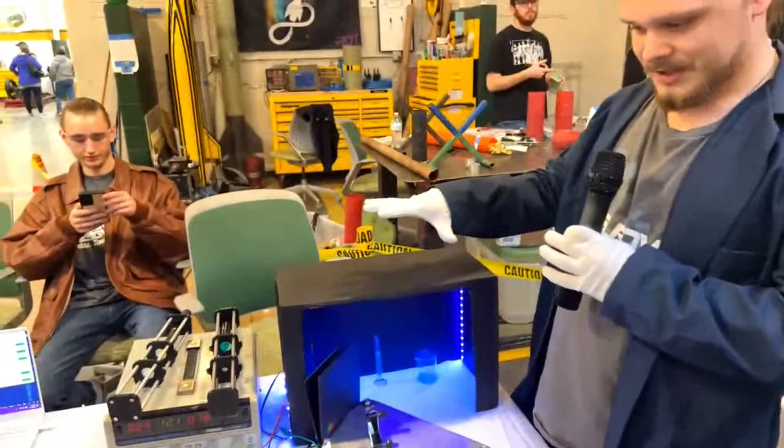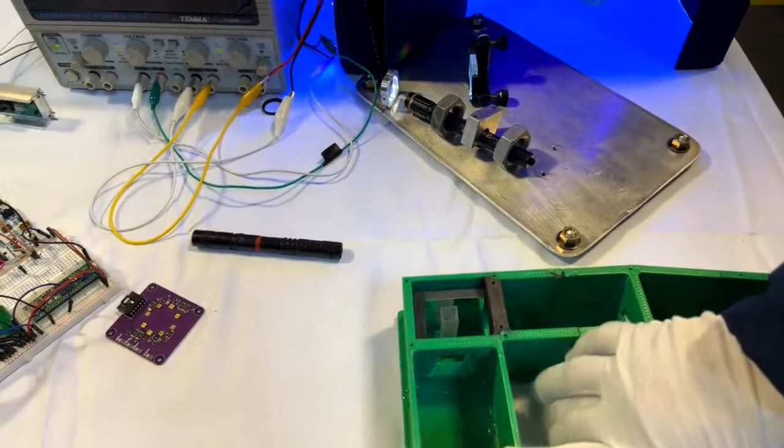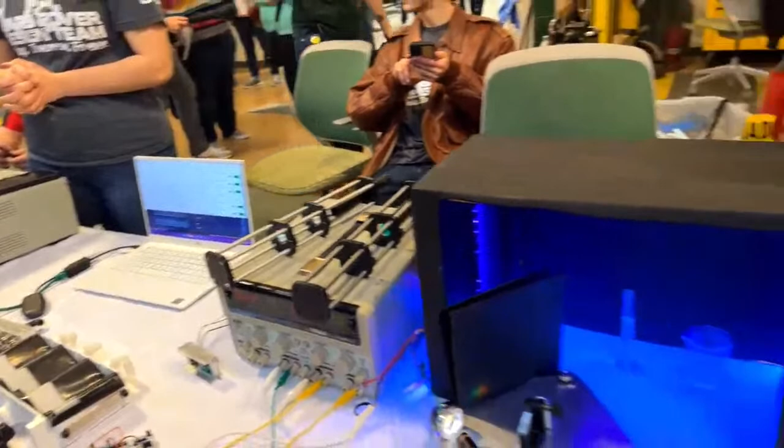Can you talk about your system?

Is it working? Okay, all right, so this is the science analysis part of the Mars rover design team. Basically our goal is to see if there is life in whatever we're looking at. So our competition will give us soil just like this, and we will have to use various methods to see if there's any life in there. One of our methods is actually using a microscope, and we can see these rocks and particles in here - we can kind of see, is this the right stuff that could have life in it? Another thing we have is chemicals.

What's happening? Damn. Rest in peace.

Do I start from the beginning?

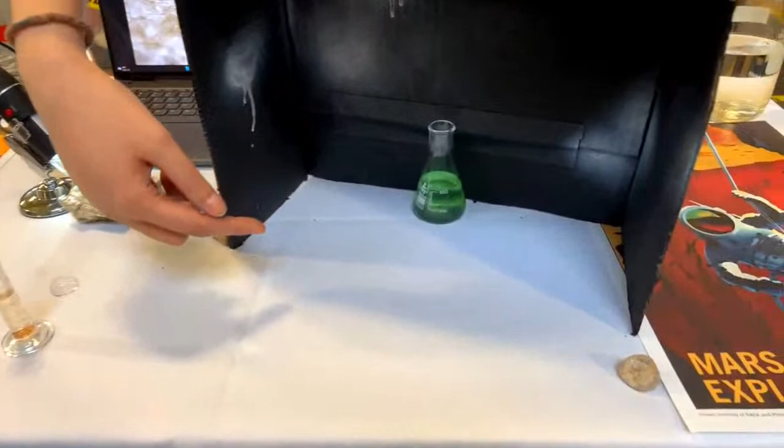When you shine a light... light's not even there, hold on.

When you shine a fluorescent light on this chemical, it will actually shine a different color. That's one of the things we use to detect life, because all molecules will fluoresce at a certain color. They shake a little bit, and that bounces back a different color, and we can see that there's something in there.

We also have different chemicals that will change color when something is present. Right now our chemicals are looking for proteins and sugars, both things that life needs to keep going. Lastly, one of the newest additions to the Mars rover design team's science analysis is our fluorometer.

We are super excited to use all of our technology in this year's competition and see what we can find.

Jacob, can you tell us about the autonomy?

In the autonomy task, our goal is this: we'll be looking for a tag like this, and they'll give us a GPS coordinate within 60 feet of that tag. From there, we need to drive within just 6 feet of the tag and then flash our lights to show the judges we're close enough and finished.

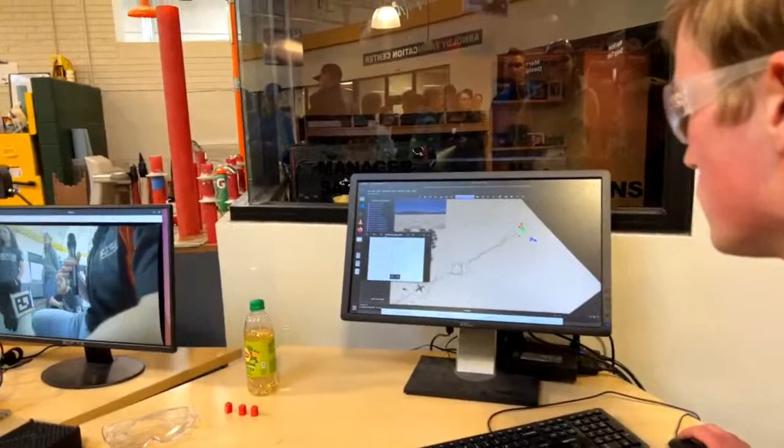Setting up the rover and testing can sometimes take a few hours just for prep time, so this lets us test efficiently whenever we have new code and just want to see if those small changes work.

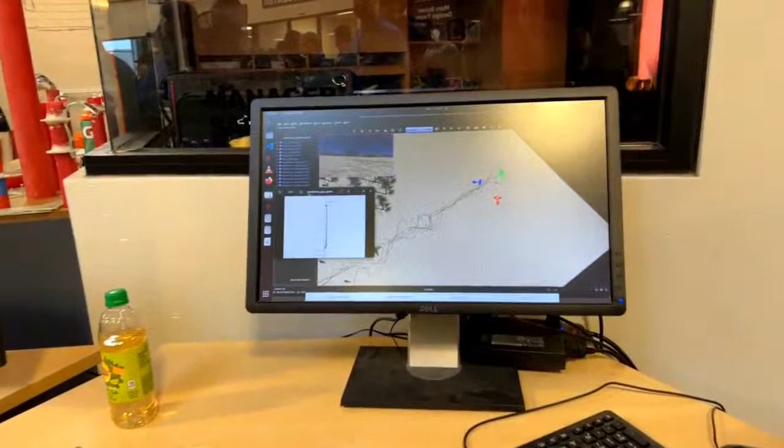Everything in the sim is absolute, so the GPS is perfect, and there are no outside factors that could affect it poorly. So we know if the code is behaving improperly, it's a fault of our logic and not something like the electronics or GPS. This is good for knowing the code itself is good, so that when we go outside and test it, any other problems may be from an outside source like GPS. That way we know how to account for things and fix it.

Anything to add, Clayton? Yeah, that's autonomy.

What am I doing? Is this an interview? Explaining what's going on. Explain what's going on with the lights. Explain to the boards.

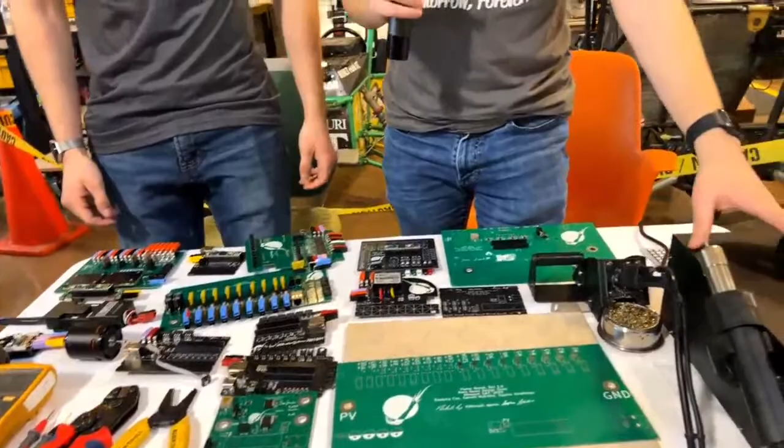Okay, well this is the electrical table. Here we have all of our PCBs we make every year. We start from scratch; we design all of them from scratch.

A separate company actually manufactures them, but once we get the blank boards like this, we assemble them all until we get a finished board like this. We have a bunch of different boards.

So we have the power board, for example. This takes power from our battery and distributes it to all the other boards on the rover.

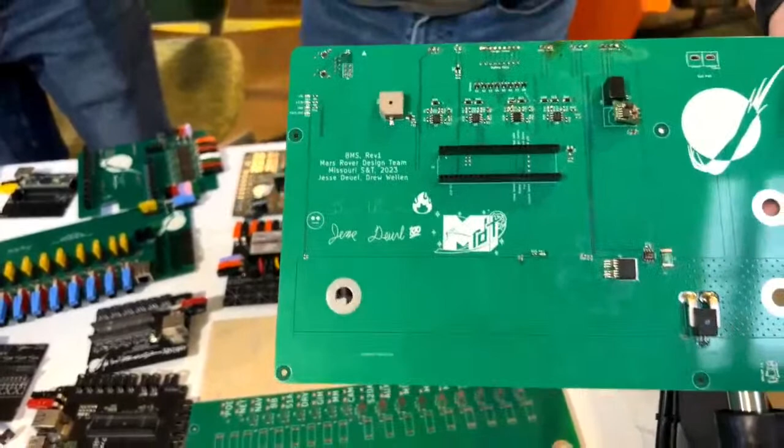We've got the BMS. This plugs in directly to the battery, monitors the battery voltage and battery current, and makes sure the battery's safe to operate. We don't want the battery to be unsafe.

We have a drive board. It controls all the motors on the rover, so we send it a drive command, go forward, go back, and it translates that into commands to each individual motor to make the rover move.

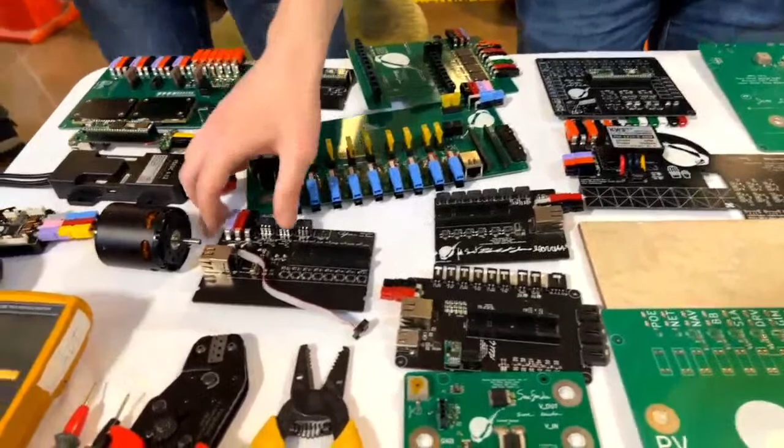We also have a gimbal board. All of our cameras are on little servo motors, so we want to be able to move the cameras to see. We have a rotate and a pan so we can see in any direction we want with our cameras.

We also have a nav board that tells us where we are. It has GPS on it, and we use it for our location whenever we're doing autonomy.

This is live. Oh, hello. I mean, sure, I can talk about anything.

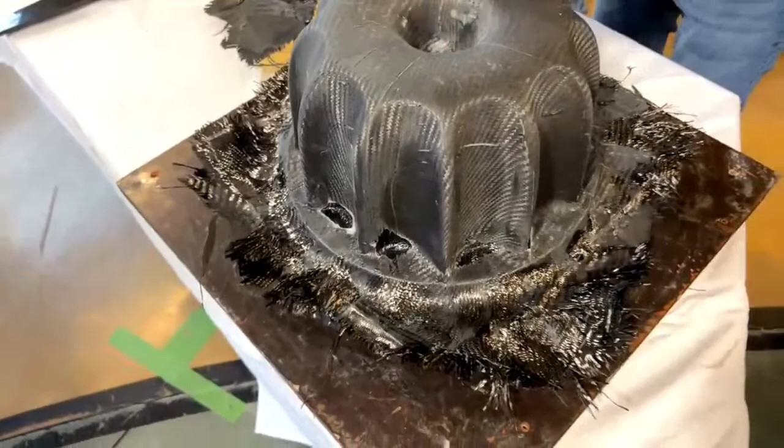So this right here is one of our custom-made carbon fiber wheels. It's not fully finished yet; the finished ones are on the rover at the moment.

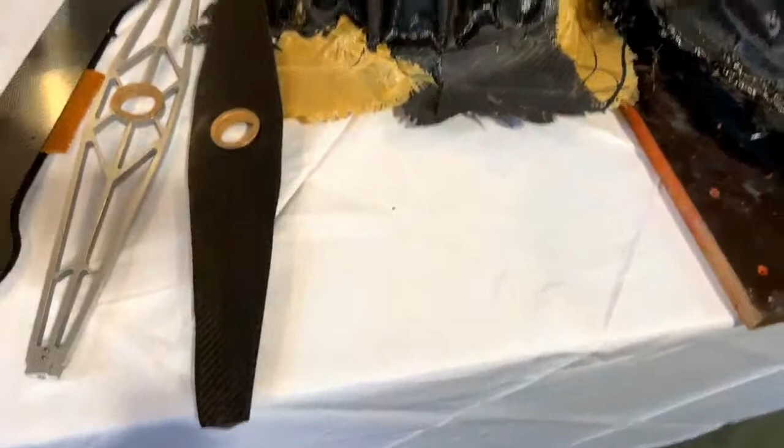What we do is take this mold and layer it with carbon fiber. Sometimes we use Kevlar to get different levels of strength and resistance. We layer it with a lot of different epoxies, layer by layer, to integrate it all, put it in an oven, and it comes out like this.

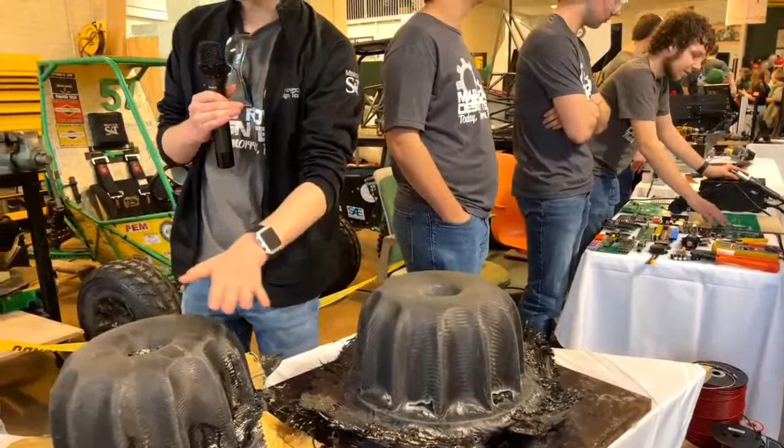Now this is only one of the stages, obviously. This whole table has a lot of carbon fiber stuff, more pieces for the wheels, and so on and so forth.

The whole thing we're trying to do this year is replace some of the components with carbon fiber. You can see that with the diff bar and the experimental diff bar here, because carbon fiber, when engineered correctly, takes no strength loss—sometimes we even gain strength—and it holds up really well while being a lot lighter.

That's what we're going for. We want to save as much weight on the rover as possible so we can put it towards other new systems. If you've seen science yet, we're trying to put a fluorometer on there this year, so we've got to get that weight from somewhere. We're cutting things where we can and engineering new solutions to continue to be here today, tomorrow, forever.

I don't know that we have much.

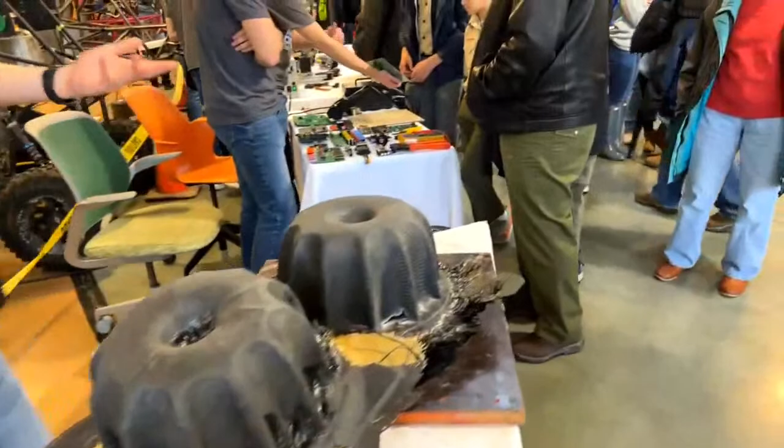Hi. How are you guys? You in the front?

So this is the computer that we use to interface with the rover remotely. Every tool that we need to interact with or control the rover is done here.

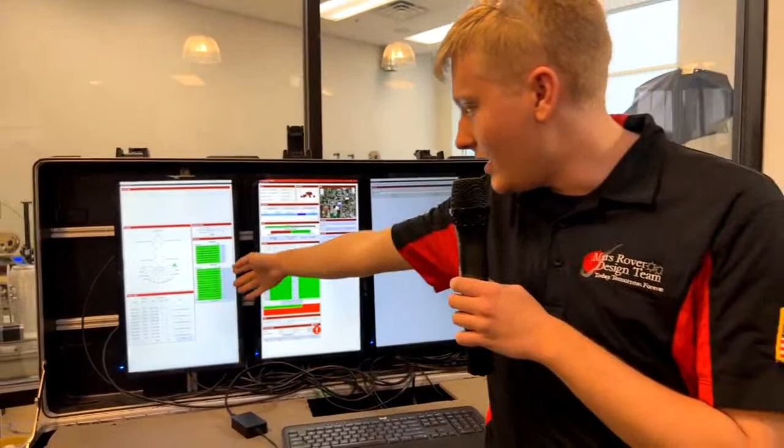Over here on the leftmost screen, that's the Rover Overview of Network, or RON for short. This includes all the tools we need to monitor our connection and monitor the data or packets being sent to and from the rover.

This is the Rover Engagement Display, or RED. This is sort of our master interface, giving us the broad, most important controls that we need to interact with the rover—like the map and GPS controls, battery monitor, and speed limit control scheme.

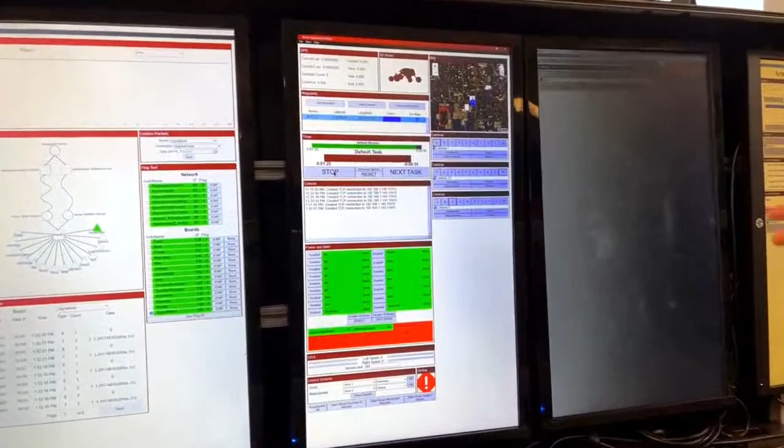Over here we have the Rover Imagery Display, or RID for short. This is just the big camera screen so that we can see what's going on.

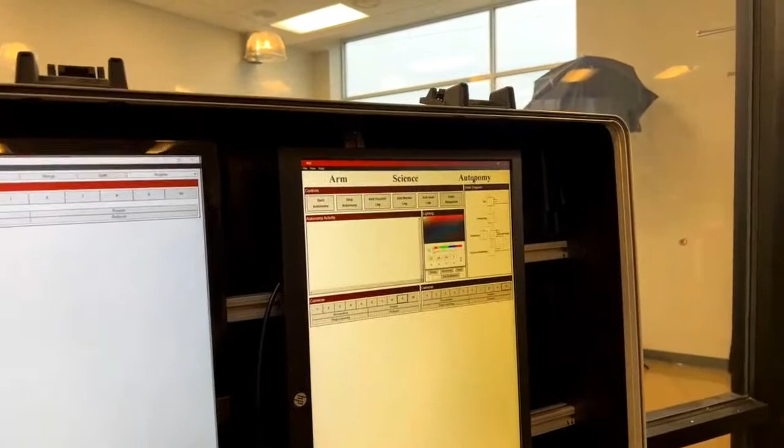Over here are our subsystem controls. This is everything you need to control the arm, this is everything you need to control the science system, and this is everything you need to run autonomy.

Hi, Grandpa. Great. Can you tell us about the signal stack? Sure.

This signal stack has two different frequencies that we can use, 900 megahertz and 5.8 gigahertz. Essentially we can rotate it to whatever angle we want, so we have a stepper motor on the signal stack here. We can send step commands, and we're working on sending position commands as well, so we can point it towards the rover and get a better signal connection.

Hi, Mom. Also, Today, Tomorrow, Forever has changed its meaning for me every step of the way that I've been on this team. It started when I was just a member wanting to expand my knowledge—I didn't really know anyone, I just knew I needed to learn more. But now I would say I'm here because I like the people I'm with, and they feel like my family at this point.

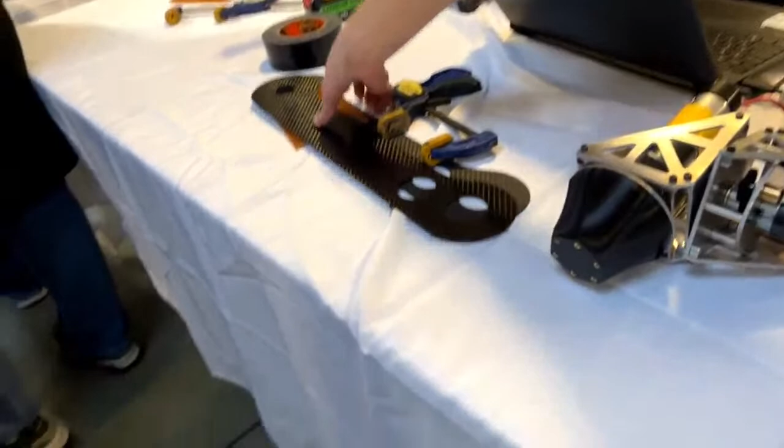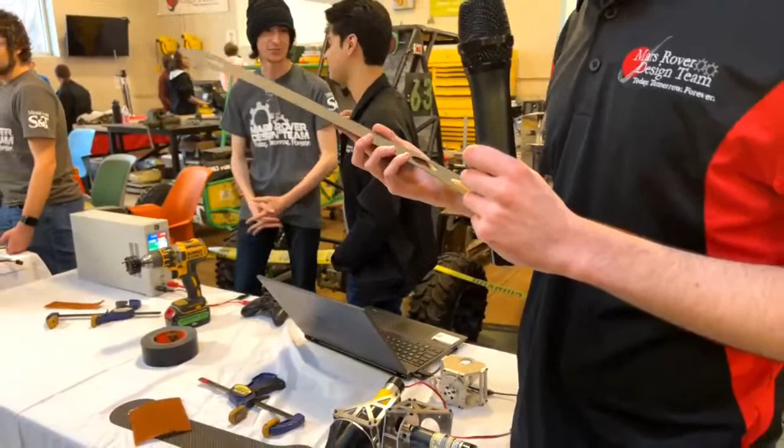So we have some different R&D stuff for the arm we've been working on here. These are a pair of carbon fiber plates we're going to use to replace an aluminum part on the bicep. Currently they're a little bit floppy, because they're not spaced apart any. So what we're going to do is take these, add some aluminum inserts where it attaches so we don't have bolts going through carbon fiber.

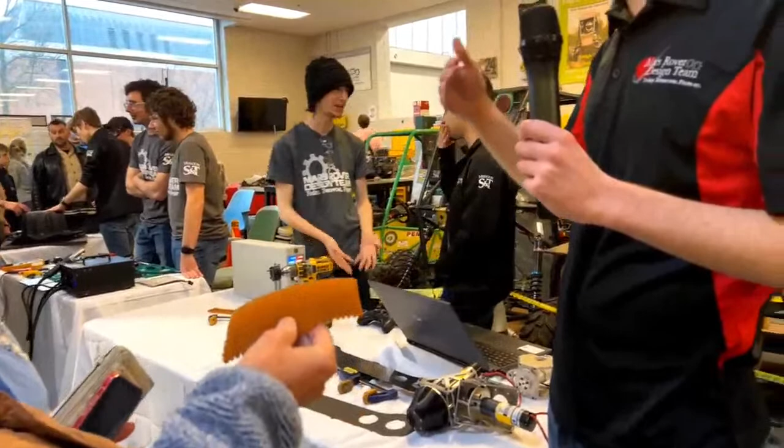And then stack it up with a piece of core material here in the middle. This is Nomex stuff, but you can feel it, it's very light. It just exists to take space, so you can space your components apart, increase the moment of inertia of the part, and make it a lot stiffer.

So this will save some weight over the aluminum equivalent, and it should also be significantly stiffer, because carbon fiber is like a fabric. If you've ever had a thread you're pulling on, or a rug or something, in tension it takes a ton of load. So when the arm's being bent, when it's put under tension, the part won't deform much, which will lead to more accuracy for the arm overall.

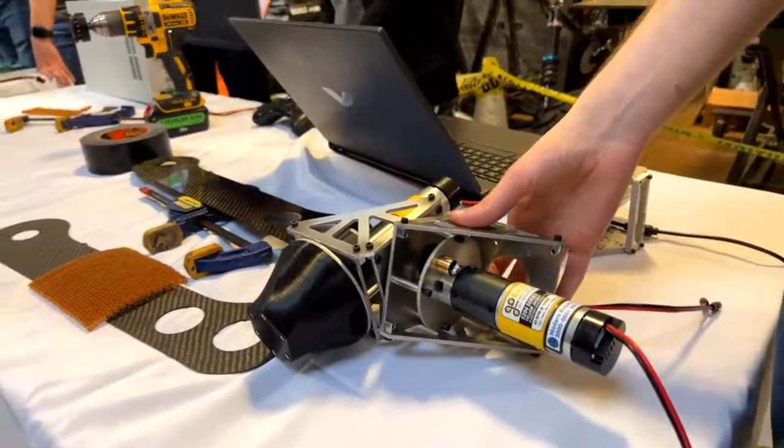There's also a mechanism here, an R&D wrist. So this would go at the end of the arm. We'd put the gripper on the front here through these little threads. And then this gives us our 2 degrees of freedom.

Notably, our current wrist is a set of diff gears, which requires a very large, very wide forearm. We'd be able to replace that with essentially half the amount of metal. And there's less backlash in this than our 3D printed gears.

Can you hold the microphone for a bit?

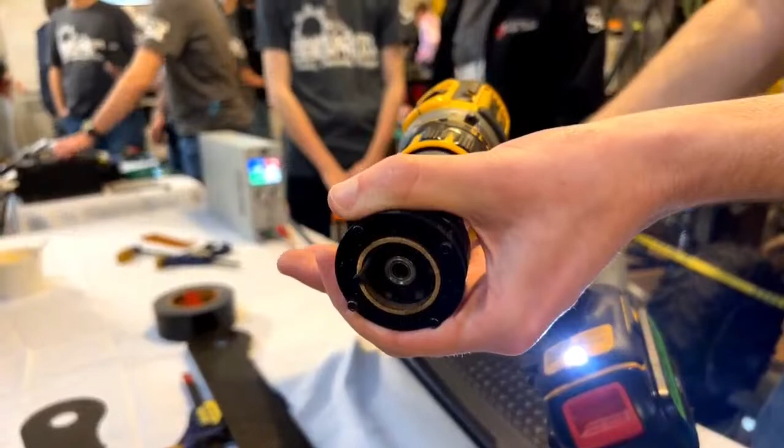So this guy, if I go ahead and spin it, you can see how much slower the output is going compared to the drill. This is about a 15:1 gearbox, and it's a very nice form factor for robotics because these guys tend to be very compact, very flat, and they can get very high gear reductions.

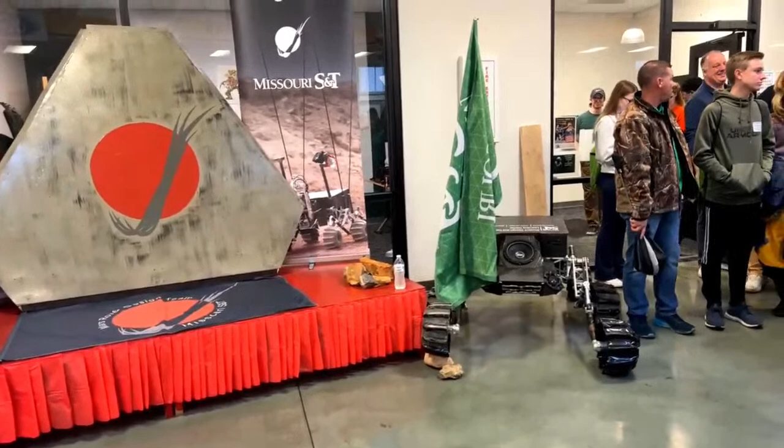Oh, do I have to? Sound check. Testing, testing, test 1, 2. Testing, testing, test 1, 2. Testing, testing, test 1, 2. Test, test, test. Did we turn on the gain on that? Testing. Or I could just not use the microphone. Okay, then we can just put this level down and I'll just talk really loud away from the mic. Testing, test 1, 2. Cool. That can be a game time decision. Yep, sounds good. Excuse me everybody, excuse me. Okay, squeeze through here folks. Pardon me, pardon me. Microphone troubles, yeah.

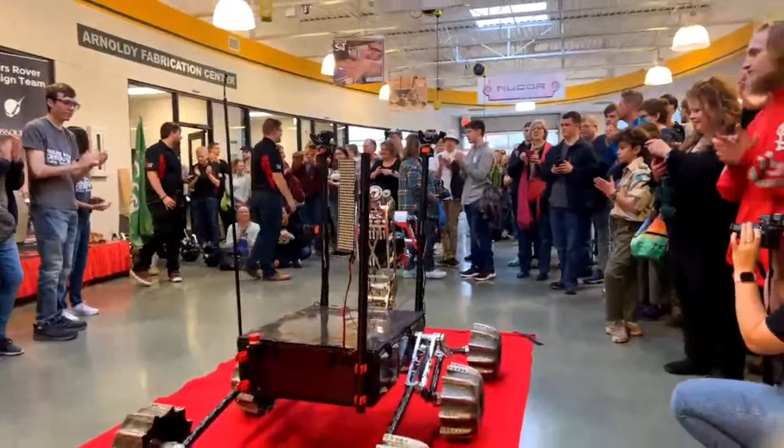All right, so like Max said, I am... this is the door. Good.

So I'm Keaton Rofer, I'm the CTO. I'm just going to go over a little bit of the technical side of Helios. Before I do that, I just want to thank you guys so much for coming. We could not do this without our members, we could not do this without the support of their families, our amazing alumni.

When we look at this rover, we're going to talk a lot about the new things that are going on, but I think that causes us to forget about the amazing things that we kind of take for granted, that we just do every single year, that's just normal to us. We do these things every single year and we don't even think about it, because to us, that's just the way it is. And that really is due to the support of our amazing alumni giving us that platform. Some really impressive, amazing things just seem normal, just seem every single day.

Like Max said, we've competed in the Mars Rover Design Team, or the University Rover Challenge, for 11 years. We design and build a new rover from the ground up every single one of those years, including in 2020 during COVID. Every single year we redesign, rebuild a rover, and we take a new rover out to Hanksville, Utah every single year.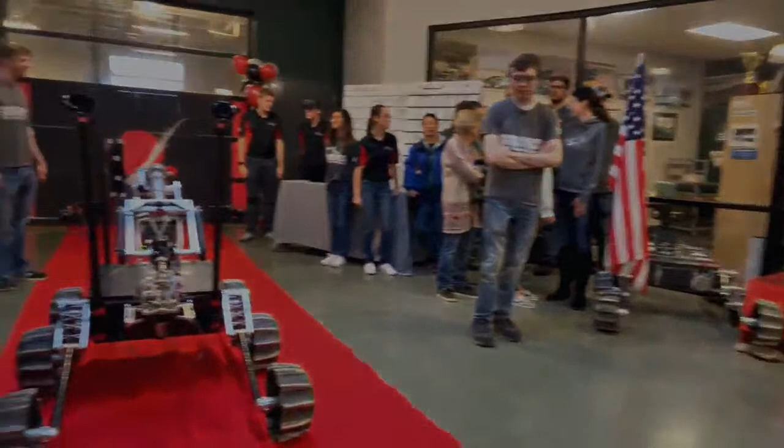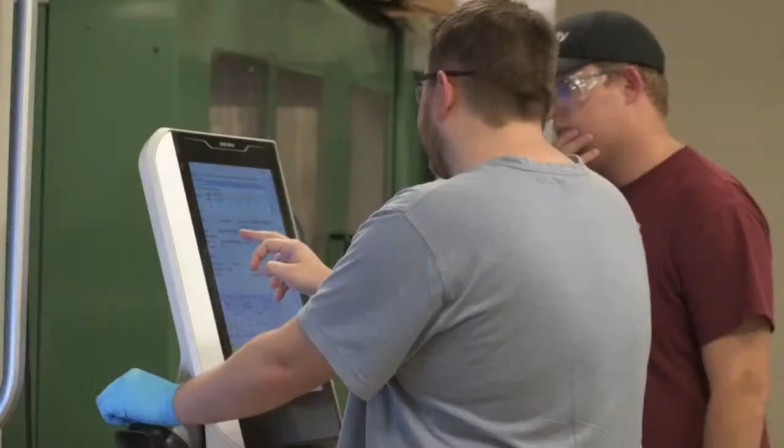Since the end of URC 2022, the Mars Rover Design Team at Missouri S&T has been hard at work researching and refining both our novel and legacy systems, so that through a combination of computer-aided design, finite element analysis, bench tests, and task simulations, we will be able to meet all competition requirements. The Mars Rover Design Team is proud to present our 11th rover, Helios.

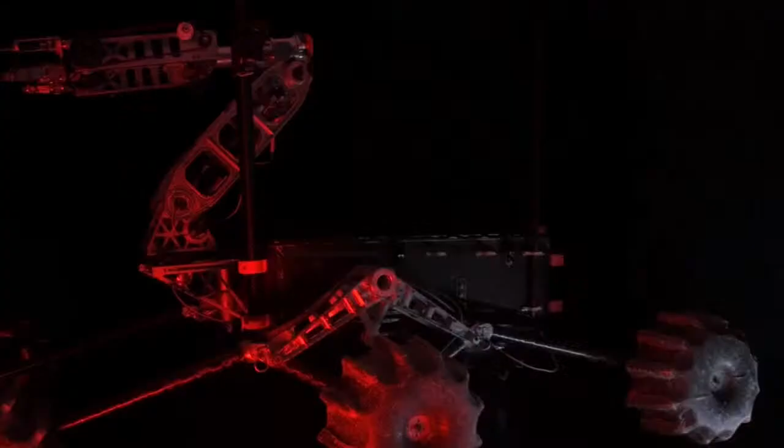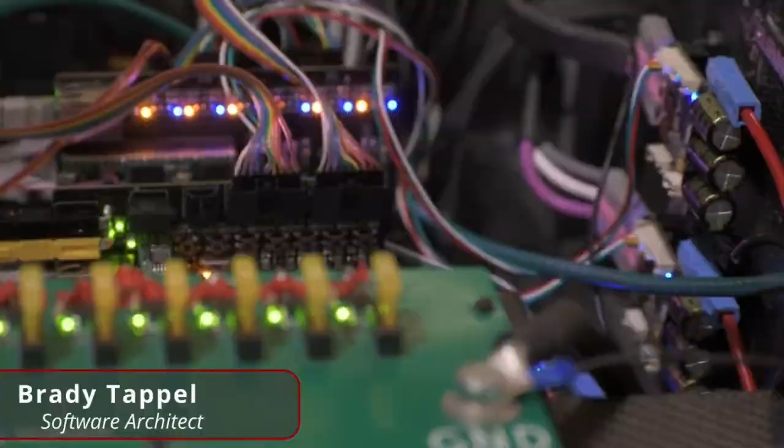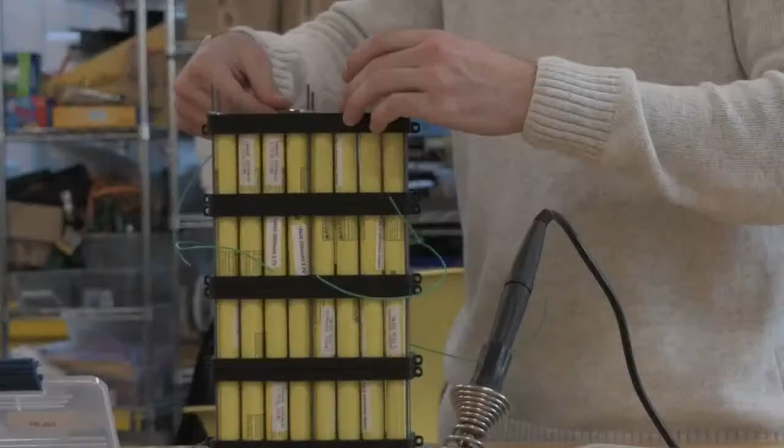Helios features a signals overhaul this year. A managed network switch runs 900 MHz, 2.4 and 5.8 GHz bands simultaneously. A Jetson Xavier streams up to 8 parallel camera feeds over UDP, while GPS is improved through a differential positioning system. A custom 8S8P lithium-ion battery with current sensing and active filtering capabilities powers a 14 PCB distributed architecture.

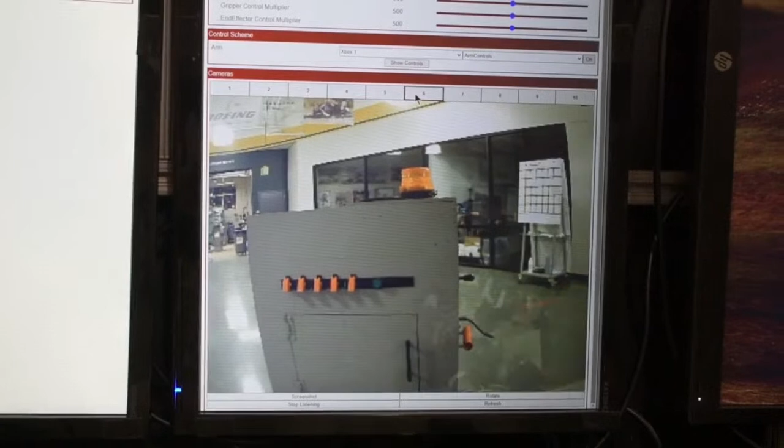To interact with the rover, MRDT has written a custom GUI application in which operators are able to see and easily switch between camera views, monitor the rover's location on a map, position the rotating signal stack, and view diagnostic data sent from the rover. These systems provide operators with insight into the rover's state, while an attachments manager displays results from the science hardware and allows precise control of the arm.

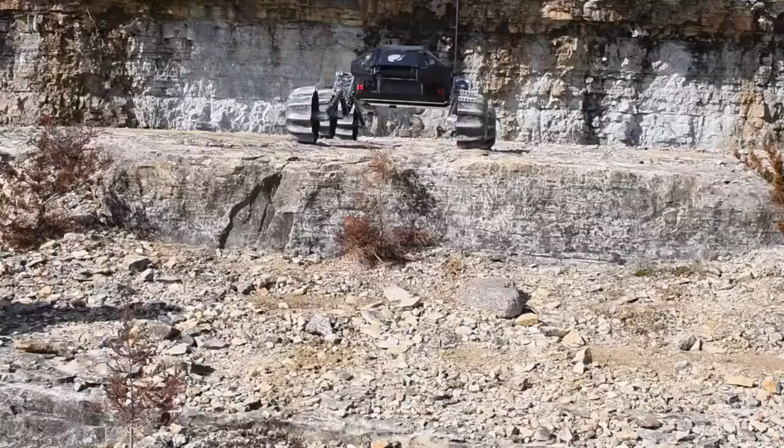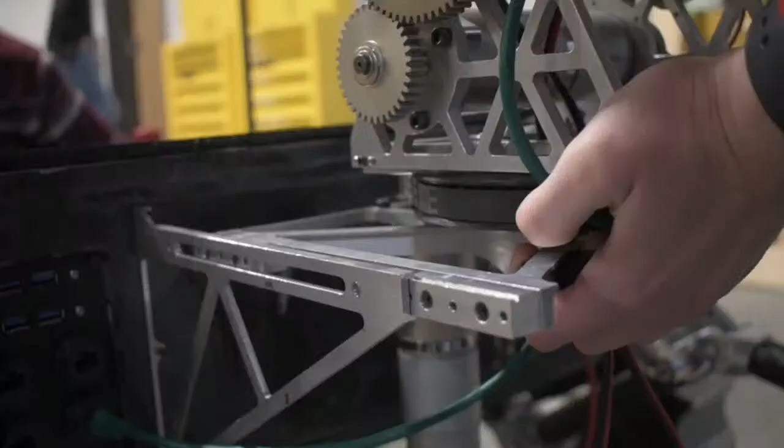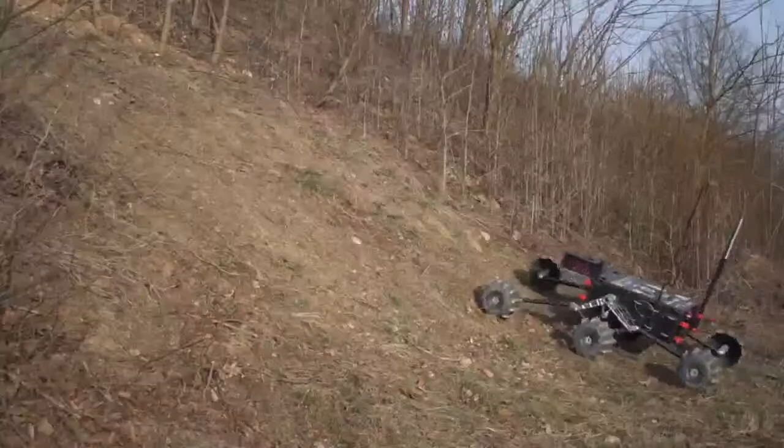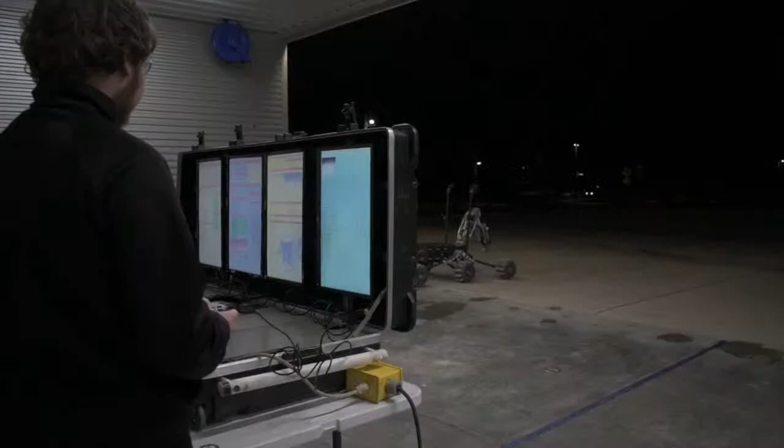Paired with a 6-axis robotic arm, our rover has the ability to locate, pull, lift, and carry a large range of tools and objects while traversing sandy, rocky, and uneven terrain. Our camera and gimbal system allows base station to view the state of all systems during the missions while providing greater viewing angles during operation.

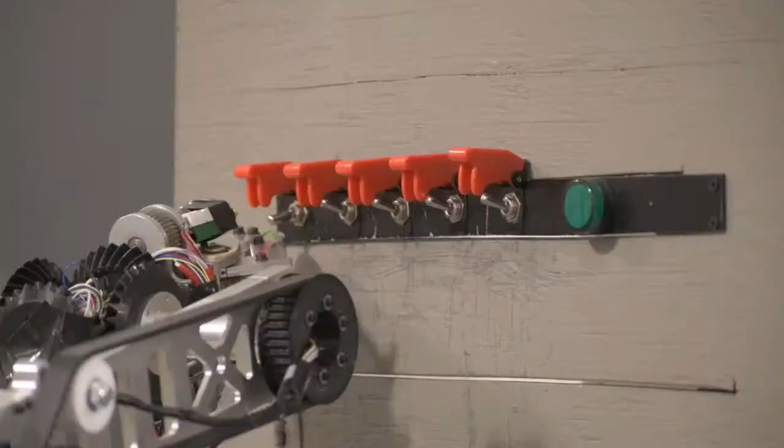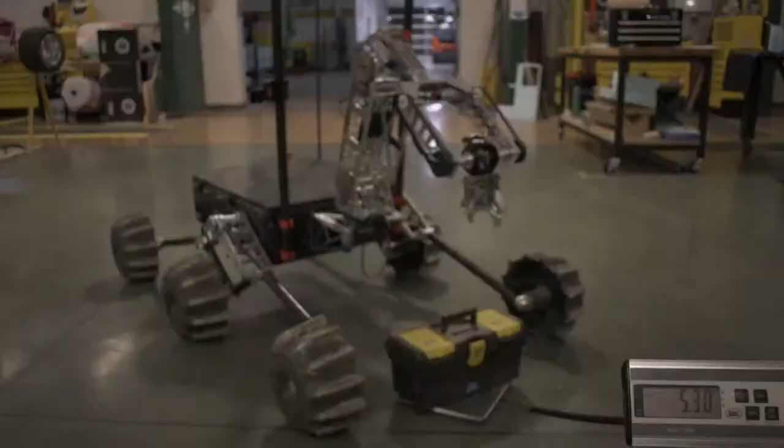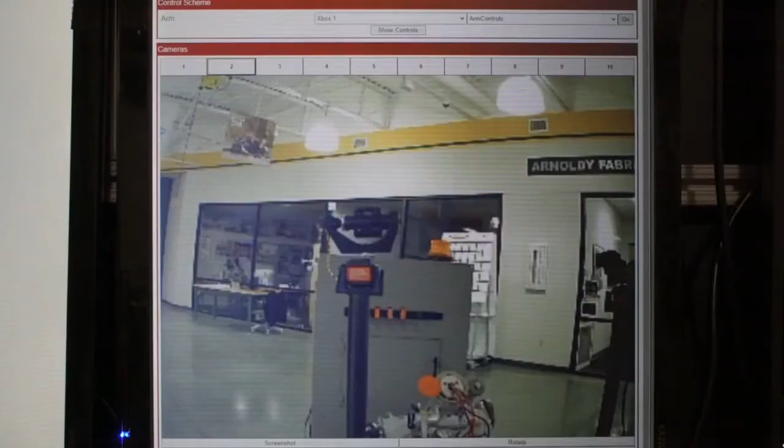Helios' new 6-axis robotic arm gives it the fine control, strength, and range of motion required to successfully complete the equipment servicing task. An inverse kinematic PID control scheme actuating through custom H-bridge motor controllers and brushed DC motors enables fine control of each joint. A new combined end effector design is both simpler and lighter, while maintaining the ability to lift a 5 kilogram weight, open drawers and cabinets, tighten a hex bolt, type on a keyboard, operate a joystick, and insert a USB stick. Cameras on the forearm and gripper provide optical feedback and depth perception inside the base station, while a camera on the back of the rover provides an alternate viewing angle of the arm's relative position.

For the autonomy mission, Helios utilizes a differential GPS for precise point-to-point navigation. During navigation, the rover utilizes our new Triclops camera layout to stitch together images from a ZED2i stereo camera and 2 180-degree side cameras to create a larger field of view. 2 asynchronous computer vision algorithms allow the rover to autonomously navigate to its goal.

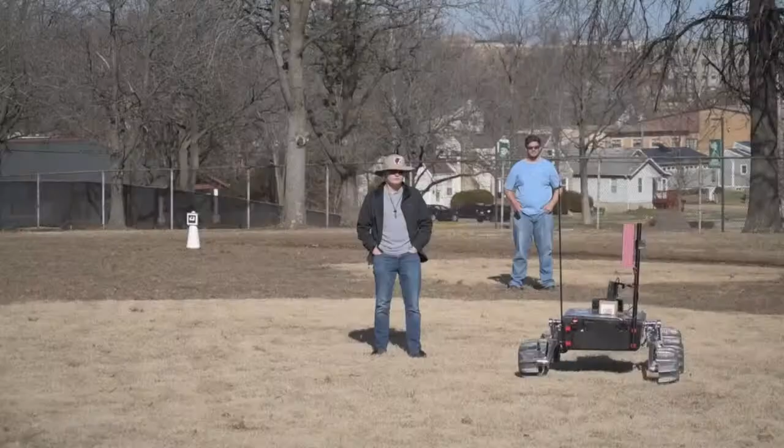The first algorithm detects AR tags using OpenCV's Aruco library. The second allows us to avoid obstacles seen in the Zed's 3D point cloud using a custom trained YOLO model and an A-star pathfinder. Upon successfully reaching a GPS waypoint, our rover will enter into a search pattern state and spiral outward until the AR tags are found.

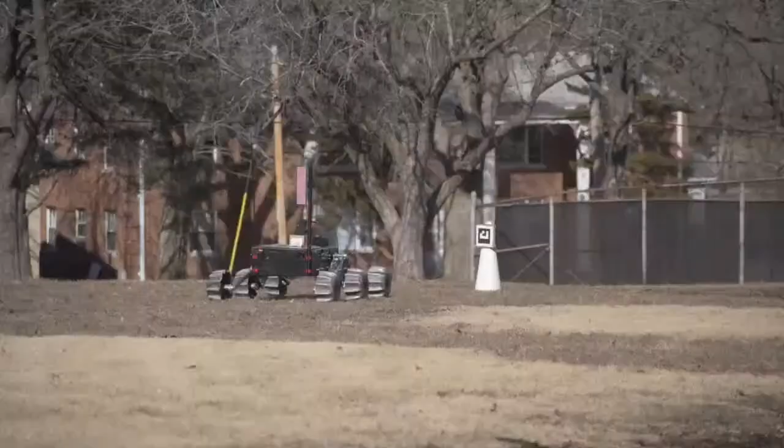The rover will then enter a new navigation routine to either approach a single marker or maneuver through a gate. Completion of the task will then be indicated using the LED panel on the back of the rover.

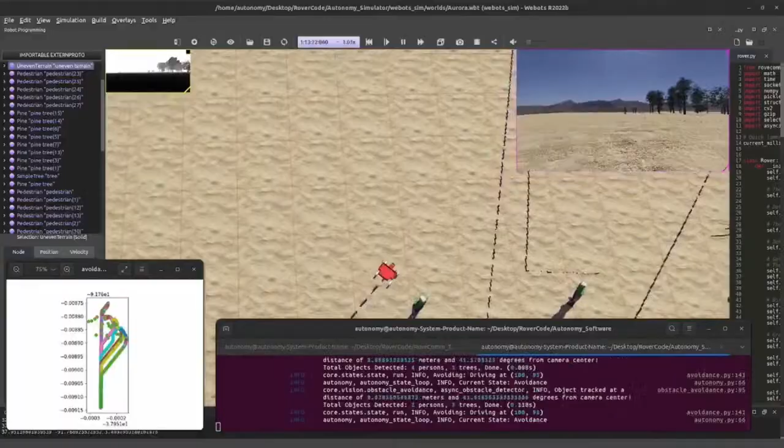Utilizing old rovers and the Webots robot simulator, each new feature goes through a rigorous amount of bench and field tests before a final review and ultimate push to dev.

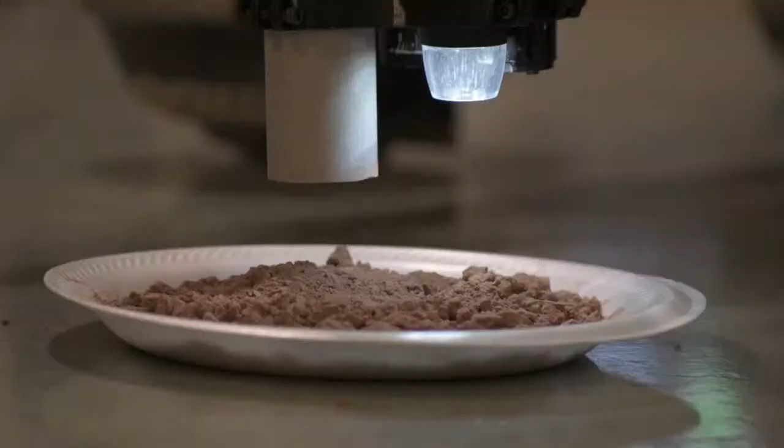Our redesigned science gantry system now utilizes carbon composite tubes to reduce the weight by 33% while improving rigidity. To analyze soil samples, we lower our updated instrument array into each sample site.

Housed in an electroplated casing, our new custom fluorometer uses 6 UV LEDs and an optic system to induce fluorescence for the detection of life. Receiving between 330 and 600 nanometers, amino acids and carbohydrates can be detected.

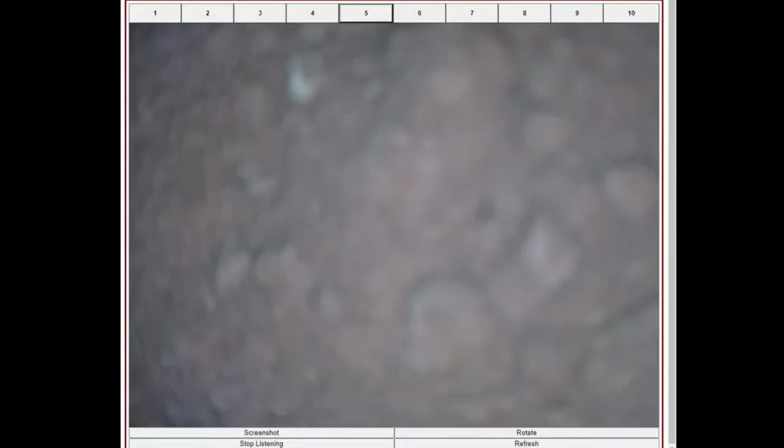It is paired with a microscope capable of 400 times magnification, allowing us to see sediment grains within the soil sample. Finally, gas sensors allow us to measure the carbon and nitrogen biological cycles in action.

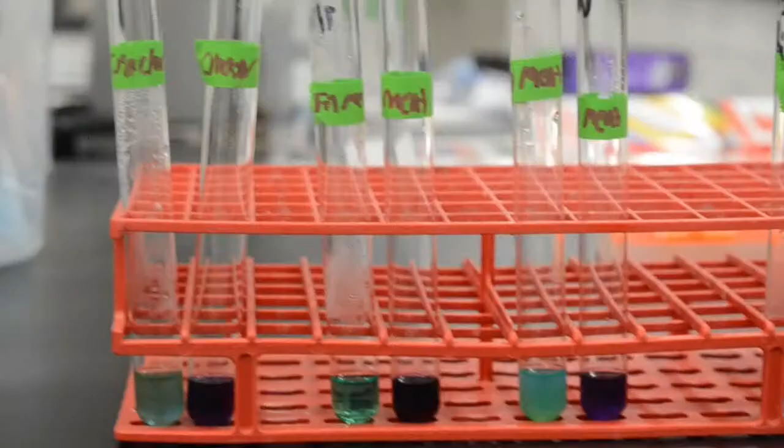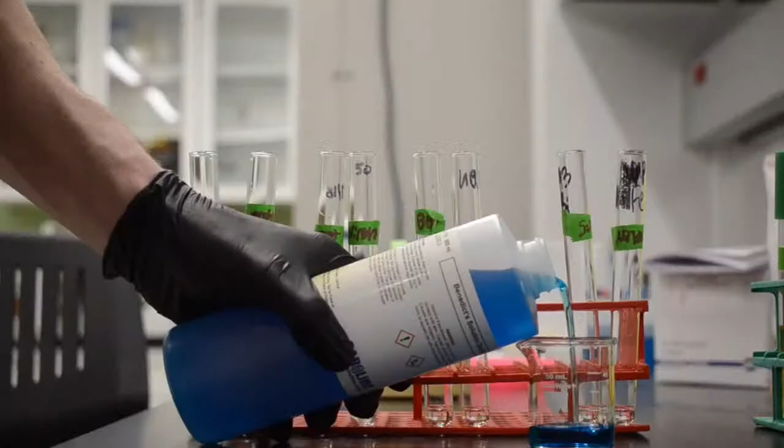Helios is also able to run a series of chemical tests along with its instruments. Using a multiplexing water distribution system driven by a peristaltic pump, our latest chemical suite utilizes the ninhydrin and Benedict's test to look for amino acids and reducing sugars in our soil samples.

After analysis is complete, a soil cache box allows us to collect up to 10 grams of material with the highest scientific value for future analysis.

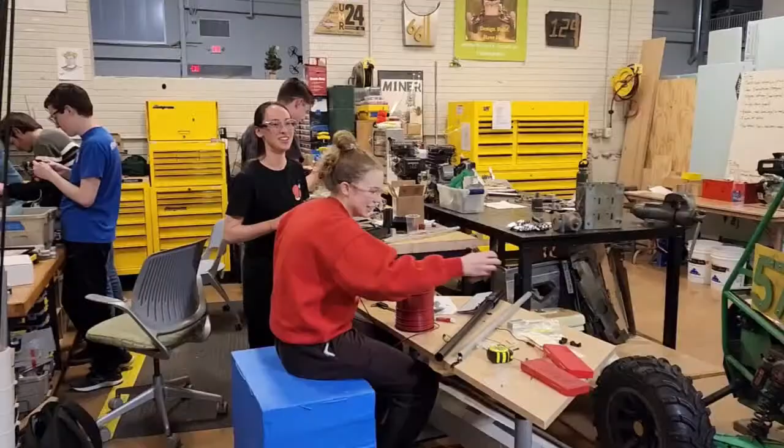The creation of an R&D division has enabled our team to explore more ambitious ideas and processes while maintaining our ability to address issues identified during previous URC missions.

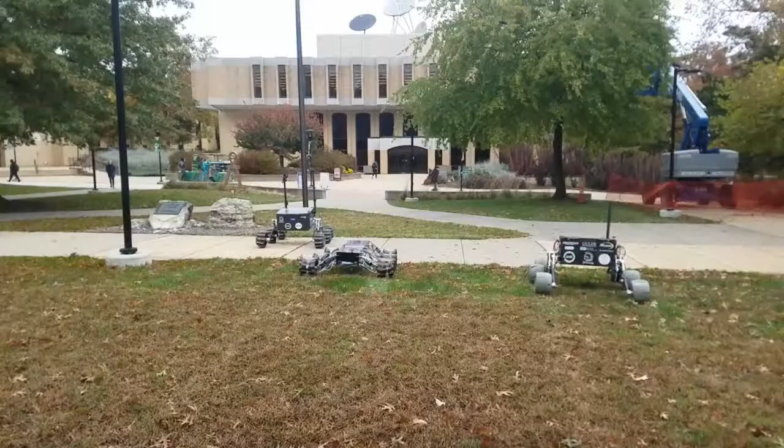We have placed a heavy emphasis on structural composite components, spectroscopy methods, electroplating techniques, and brushless manipulators to incorporate into future designs. Thank you for your consideration. The Mars Rover Design Team looks forward to competing at the University Rover Challenge this June.

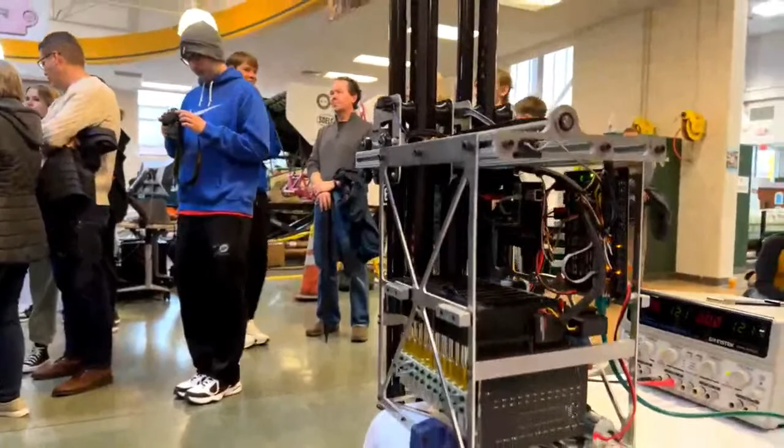Dropping down our 3D printed scoop down to a soil site, and you can see the scoop open, pick up some soil, bring it back up, and then deposit it into our 3D printed funnels.

Once it's deposited, we can use a custom water multiplexing setup to deposit water in the soil, and you can see it move across different channels here.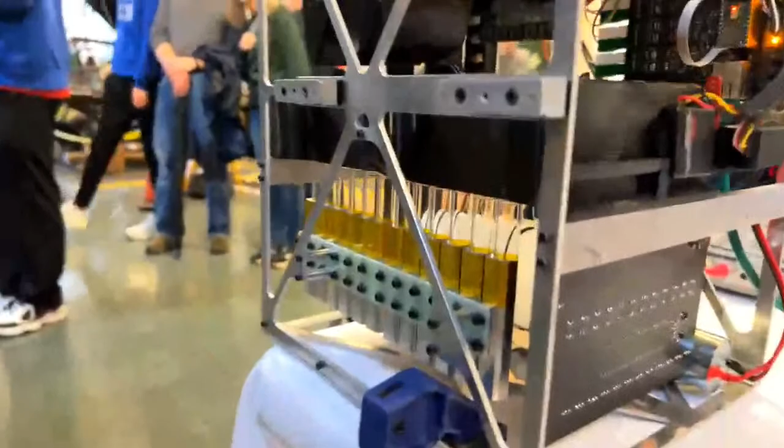Once water is deposited into the soil, it will run through the funnels and then down into these test tubes. These test tubes have been preloaded with chemicals from our science analysis team. If you see the silver blocks, those are our heater blocks, and the purpose of those is to heat the chemicals up to 100 degrees Celsius and catalyze the reaction to a visible result that we can view on camera.

And then finally, on our sensor side, we have a microscope and custom fluorometer, that'll look for signs of life just by using fluorescence, and also visibly looking for cells.